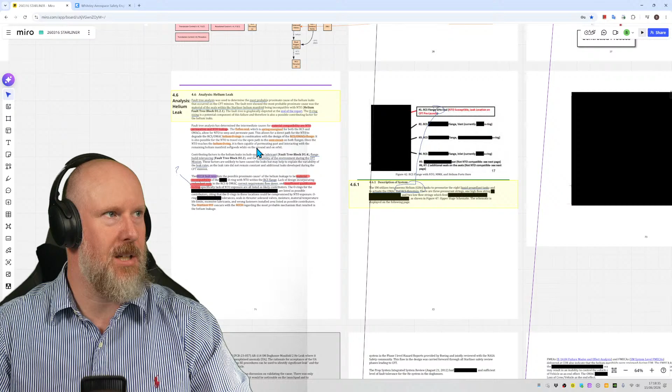We got quite far through that, let's see how far we got. Yeah, we got to the end of that section. And so the next section we're working on is 4.7, analysis, deorbit capability, fault tolerance. So this is a slightly different topic.

So let's take my jigsaw piece. I ought to make this available for download, I keep saying that and I've not done it yet. There we go, section 4.7. So let's start with that then. Make sure audio is working. Yeah, we've got some streaming, the internet's working, that's good.

Okay, here we go. So following the first crew flight test launch attempt, in conjunction with the discussions regarding leaks in the helium manifolds of the service module reaction control system propulsion system, NASA and Boeing teams realized that the service module propulsion system was not two failures tolerant for the deorbit requirement. So I'm just going to make a note of that: it's not two failures tolerant for the deorbit requirement.

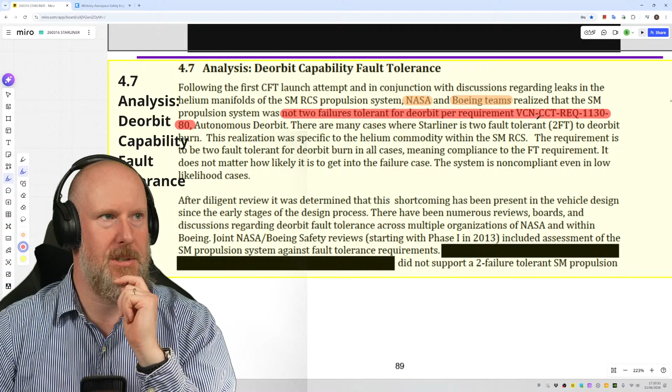Requirement 1130-80. So I imagine they've got a really elaborate requirements management system, and that'll be written in a lot of their safety case equivalent documents, and they'll use that as part of making go, no-go decisions. So of course, if they've realized that the service module propulsion system was not two failure tolerant before they did the actual second launch attempt, there's an interesting question there over whether it was really appropriate to go ahead with the launch or not. And of course, we've just read the third sentence in a paragraph in a massive report.

So of course, I'm anticipating there's going to be some more discussion about that. But from a safety constraints perspective, if that is the requirement, we need to be two-fault tolerant for deorbit, and they know before they've launched that they're not going to achieve that. Is it really appropriate to then go ahead and risk doing that launch?

Now, of course, I'm saying that from a position of not having read the rest of the report, so I don't know what I don't know. Maybe there's a lot of other things going on. So what I've said is a bit of a ridiculous lay thing to say, and I don't know that yet. I'm going to learn that as we go through the reports. But if that's the safety requirement, that's the intent, then it sort of raises eyebrows a little bit.

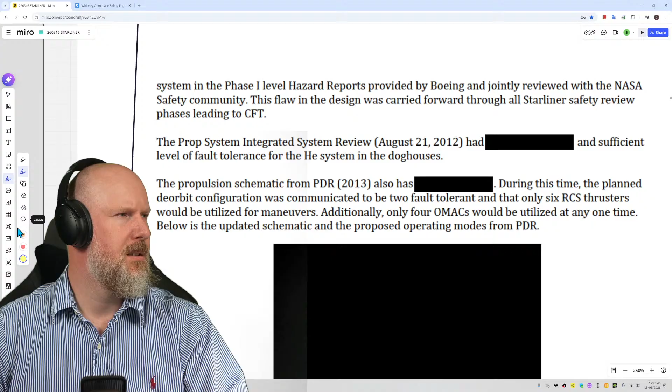Okay, that's the Propulsion System Integrated System Review, August 21st, 2012. So that's quite a long time ago in the context of things. It had an insufficient level of fault tolerance for the helium system in the doghouses. The propulsion schematic from the PDR in 2013 also has this flaw.

During this time, the planned deorbit configuration was communicated to be two-fault tolerant, and that only 6 RCS thrusters would be utilized for maneuvers. Additionally, only 4 OMACs would be utilized at any one time. Below is the updated schematic and the proposed operating modes from the PDR.

Which we can't see because it's blanked out, which is perfectly fine. I can understand they don't want to put a propulsion schematic in a publicly releasable document. I totally get that, you know.

The propulsion schematic from CDR indicates 2 helium manifolds per doghouse and GNC subsystem CDR, which occurred in April of 2014. So that is guidance, navigation and control subsystem critical design review. So this is an important milestone in the program.

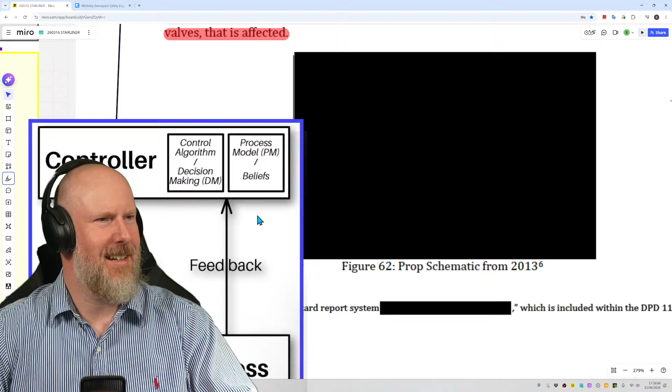This schematic is within the hazard report system, which is included within the DPD 110 and therefore has limited rights. So if I remember correctly, this type of hazard report document is subject to some kind of data protection contractual rights of release of data. Therefore, it can't be released in this report. And I wouldn't expect them to do anyway, to be honest.

But if I've interpreted what this says so far, it sounds like the design was not two-fault tolerant for the helium part of the system. And the helium part of the system controls the... where is it? Yeah, that bit there. It's used to pressurize...

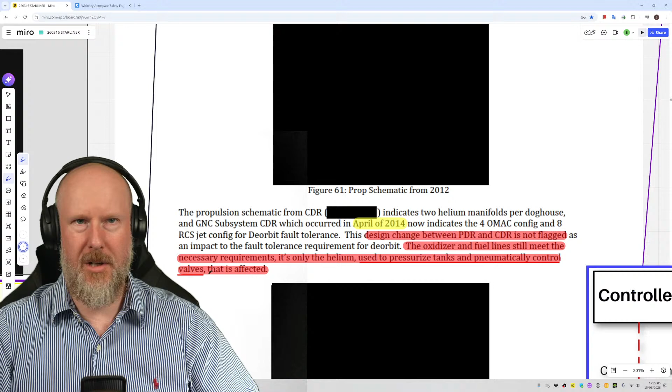The helium system is used to pressurize tanks and pneumatically control valves, so we're talking about valve control. If we get our little jigsaw piece out, we're talking about this control path here. There are some actuators in there of which the helium system is contributing to, and the control of the helium system is in there somewhere, and that has an implication for thrust, controlling thrust.

The shortcoming has been, after diligent review, determined to have been present in the vehicle design since the early stages of the design process. There's been loads of reviews, boards and discussions regarding that fault tolerance within Boeing and NASA. Then the safety reviews begin in 2013, including an assessment against fault tolerance requirements. It did not support a 2 fault tolerant service module propulsion system in the Phase 1 level hazard reports provided by Boeing and jointly reviewed with the NASA community.

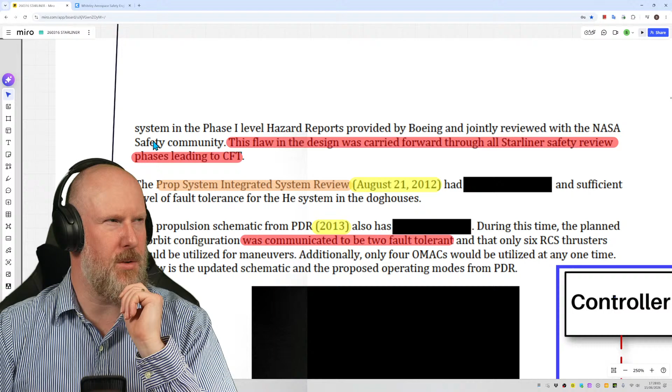This flaw in the design was carried through Starliner safety review phases leading to CFT. Now, I'm not quite sure I understand what's been said here. It kind of implies that the architecture, the design is a flawed design. It doesn't meet the requirement. So that's one thing. That's the first thing.

But it seems to imply, and I might have interpreted it incorrectly, that this wasn't obvious until there was a diligent review during the launch process, or that's when questions were started. That's one way of interpreting it, and I might be interpreting it wrong, so please type in the comments and let me know what you think. But the other side of it is that they knew about the flaw in the design, in the requirements, not meeting requirements, and it was carried through all the way through to CFT.

So this is kind of a second engineering topic that's found its way all the way through to the end. It should never have got this far. Or that's my interpretation - the intention is it should never have got this far. So why has it? And why has it been acceptable for the crewed flight test? Is it because there's so much pressure at that stage? Oh, well, we've got what we've got. We are where we are. I'm sure that's famous words that you've all heard.

We are where we are, Simon, so we're going to have to do it. And I'm like, no, this is what the safety requirements say. If you're going to decide to violate the safety requirements the literal day before we're going to go flying, that's not really how the safety process is supposed to work. But if the safety engineers are overruled by project managers, then this is where we are.

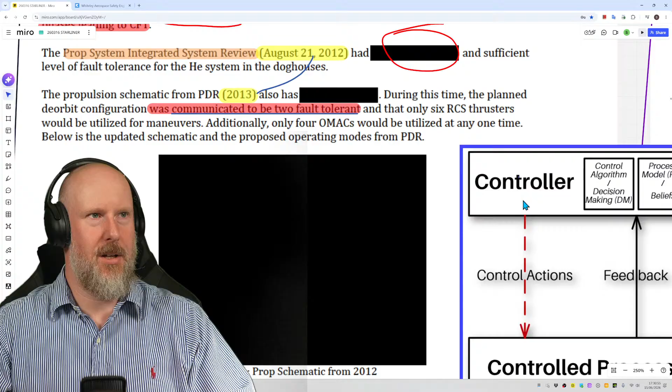During this time, the planned deorbit configuration was communicated to be two fault tolerant, but it wasn't. Is that what this is saying? Because if it was communicated to be two fault tolerant, let's look at our little jigsaw piece. If whoever this controller is tells this other controller, hey, our helium system design is two fault tolerant, you could say that that's an unsafe contributory control action. There's a whole conversation there about what do you mean by unsafe and what do you mean by contributory? Isn't it only known in the context of an outcome of an accident that, oh, actually it should not have been communicated to be two fault tolerant?

And only 6 thrusters would be utilised for manoeuvres. So again, if that number has changed over time, the architecture has changed, then that needs to be reconsidered. Additionally, only 4 OMACs would be utilised at any one time. So again, if that's an assumption that's changed, then the analysis needs to be updated.

And then below is the updated schematic and proposed operating modes from PDR. So if that's PDR, let's just write PDR. There's my really bad handwriting. Let me try with my pen. So I've got one of these fancy pens.

Let's see if it works. It's not quite as good as my Apple Pencil, but it works. It'll do. Oh look, there we go. It's better today, why is that easier?

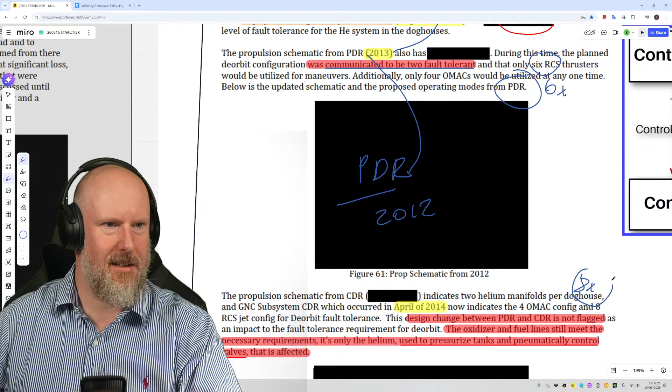So that's the 2012 PDR schematic, from, well it says 2013 there, but there we go. And then the propulsion schematic from the CDR, which we don't know when that was. Oh there we go, April 2014, now indicates a 4 OMAC configuration and 8 RCS jets. So that's 6, this is 8. There we go, it's still 4 OMACs. So there's 4 there and 4 here.

There we go, so it's got more thrusters. For deorbit fault tolerance, this design change between PDR and CDR is not flagged as an impact to the fault tolerance requirement for deorbit. The oxidizer and fuel lines still meet the necessary requirements. It's only the helium used to pressurize the tanks and pneumatically controlled valves that is affected.

Okay, and then there's the propulsion schematic from 2013. So I'm presuming that's the CDR. Oh what's this say? Yeah, okay, let's keep reading.

I'm jumping the gun, FMEAs and FMECAs. So FMEA is failure modes and effects analyses. And then FMECA is failure modes, effects, and criticality analysis. So these documents could be an update of these documents with criticality information, or they could be separate documents.

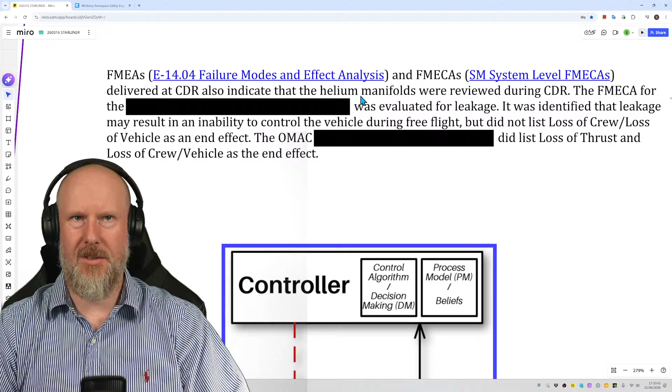And this says that it's so, E14.04 failure modes and effects analysis, and then service module system level FMECAs, delivered at CDR, also indicate that the helium manifolds were reviewed during CDR. The FMECA for the blankety blank was evaluated for leakage. It was identified that leakage may result in an inability to control the vehicle during free flight, and did not list loss of crew, loss of vehicle as an end effect.

Ooh. May result in an inability to control the vehicle during free flight, but did not. I mean, that is not good at all. That's really, really bad.

So there's an immediate question there over the controller. Who does the FMEAs, the FMECAs? So that's the first question. The second question is who reviews them and signs them off? And then there's a third question for flight critical systems, and there's a little star attached to that. Is there an independent reviewer looking at this? Is there an independent forum that's looking at these and going, well, does this correctly identify catastrophic outcomes?

Yes, no, and has it set requirements for catastrophic outcomes? Yes or no? So there's three little loops there to consider if we were doing the investigation of this, and also the process and the training for the individuals involved and the tool support, and then of course what is the context around these people doing this work? Is it a copy and paste FMEA from a previous incarnation of this design, or is it a fresh one? That needs to be considered.

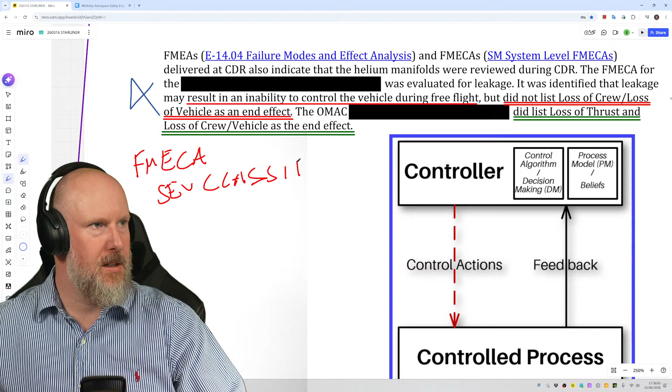So let's just get my red pen out, everybody. Here we go, so FMECA severity classification. I believe, if I remember correctly, this is exactly the same issue that occurred with the 737 MAX accidents. The FMEA for the MCAS system did not adequately set the classification for severity. Okay. That's not good at all.

Right, here we go, so this is a table, a row from the FMEA itself. And you'll notice this is the FMEA, not the FMECA. So there's two, one of them contains criticality, which is what should. And I am guessing, because some organisations, they use the label FMEA and FMECA to mean the same thing. And it could be that an FMEA in this context contains a criticality assessment, so they might use the term interchangeably. But these refer to two different things, by the way.

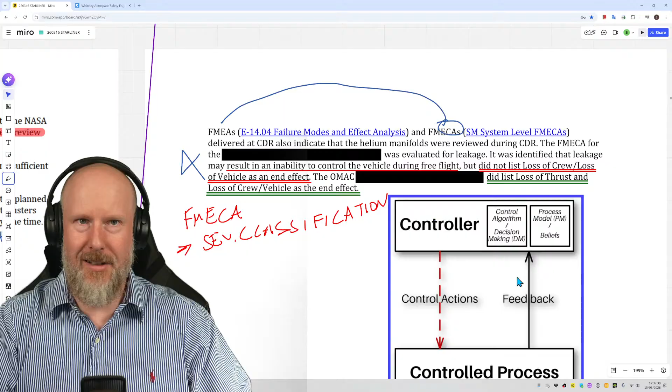This is a system level one. Now the system level one might be an amalgamation or a summary of other more detailed failure modes and effects analysis. So it is entirely possible that somebody did a very detailed FMEA or an FMECA, and then the detail of that was not transposed correctly into the higher system level FMECA. And again, let's get our little jigsaw puzzle out again. It is really interactions between organisations and how they flow information to each other. In this case, it'll be in documents and tables, maybe databases, maybe tools.

So if we're investigating that, they're the kind of things we'd want to understand and think about. But let's have a look at this then.

So first off, when you're reviewing any FMEA or FMECA, one of the things I always do is ask the question: where is the FMEA template from? Is it based on a particular standard or regulation, or a company process? What is the origin and pedigree of that? If it's just copy and paste from the last project an engineer's worked on, or copied from off the internet, or maybe AI has said, hey, let's do an FMEA this way - I'm being facetious, but the point is you should have credible sources, credible pedigree for the processes and analysis that you use.

So, of course, in civil air transport there is ARP 4761, Aerospace Recommended Practice, that has an appendix showing how to do an FMEA. And I imagine they will use something similar for this, but I don't know. In fact, there is a space standard for this. It's called the ECSS FMEA standard.

This is for the European cooperation, so hang on, it's in there somewhere - standards, active standards, let's search for FMEA. There we go, there it is. Look at that, so there is this one. This is the European one. So if you don't know about this existing, or if you do, I recommend having a quick flick through it.

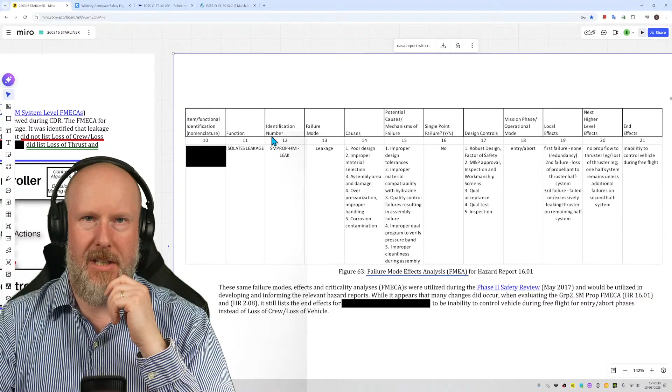Item, function, identification, nomenclature. Function isolates leakage. Okay, what leakage of what? Identification number - let me zoom in for you. Service module propulsion dash HMI dash leak. Failure mode: leakage, causes - there's 5 causes in there. Potential causes, mechanisms of failures - sorry, there's 5 of those. Single point failure: yes, no.

Interesting. I'd like some justification why they've said that. Why is it no? And again, this is just one thing - when you're doing any kind of safety case review, safety review, the question is: what is the claim? What is the argument? What is the evidence? If the claim is true or false, what's the argument, what's the evidence? Just saying yes or no is not adequate.

I could understand when you're doing an analysis like this with lots and lots of rows and tables, it may be that there's one, or let's say a subset of 5 reasons why it's okay, or it's okay to continue when it's not. You could just put those in a table at the bottom and refer to which of those, or which combination of those 5, are relevant.

Design controls, mission phase, operational mode, entry, abort, local effects, next higher level effects, end effects.

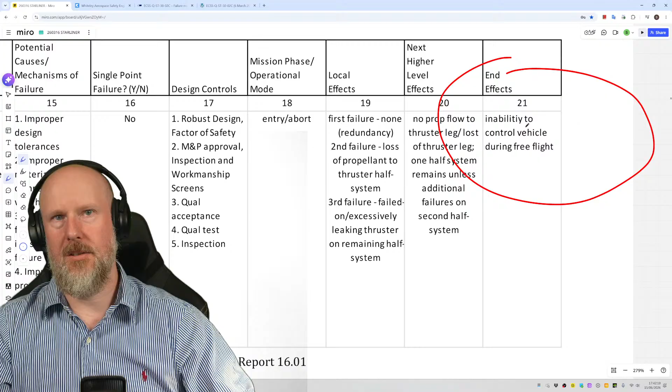Okay, so this column is the one that doesn't have the judgment as to whether it affects crew safety or not. So this is where it should be in there - so what did they call it? Yeah, list loss of crew, loss of vehicle as an end effect. Did not list... yeah, did list. Okay, so for whatever reason, they've not put it in there.

So the investigation needs to go and establish, well, why was that? And we're not here to point fingers and blame people - that is absolutely not what it's about. It's about understanding why it makes sense not to include that. And if it's literally, 'Simon, I'm using this really rubbish spreadsheet that does my absolute nutting and it's got 10,000 lines in it,' a bit of copy and paste error is guaranteed.

And if that's the case, and it is entirely possible, then the organisation needs to do something about that. And this is human machine interface - thinking about how humans do their work and how best to capture that work and make sure it's error free. That goes down to who does the review and in what form that review is done. If you have a specialist AI for your team that could do this kind of cross check, that would be helpful. But of course, don't rely on the results - it's got to be a human that signs this off.

Okay, so let's just zoom out a bit then. So this is the report for 1601. You notice there that number 1601. So I'm not sure if this is 1404 - I don't know if they're the same thing. Oh, no, 1601's down here, isn't it? So I'm assuming that this report here is 1601, or is that supposed to be 1601? I don't know. I'll not use a red pen because that's a bit over the top, isn't it?

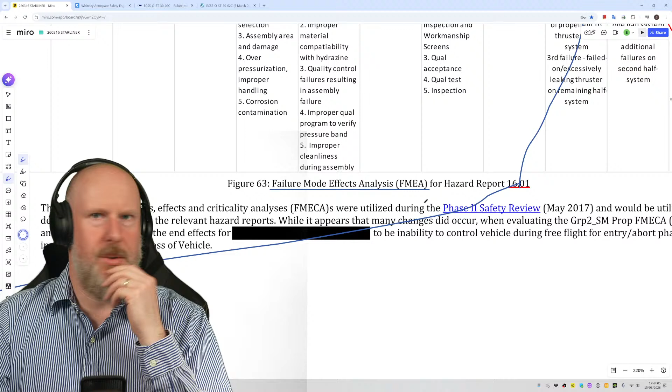There we go. Right, so the same failure modes, effects and criticality analyses were utilised during the Phase 2 safety review, which was... so that should be yellow to highlight a date. There we go, May 2017.

So was this a Phase 1 review? I think I saw earlier on - there's an integrated system review there in 2012. It doesn't say that there was a phase... Oh, there we go, there's the Phase 1 review in 2013. So that's a Phase 1 safety review in 2013, and then the Phase 2 was in 2017. In fact, what I'll do is I'll use an arrow because it's a bit cleaner, isn't it, than some scribbles across the page.

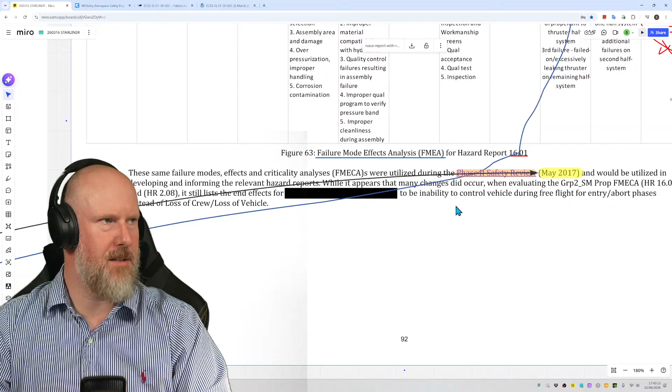There we go. Right, and would be... So it's these same failure modes and effects and criticality analyses were utilised during the Phase 2 safety review in May 2017. So the first one was 2013, four years later is 2017. And would be utilised in developing and informing the relevant hazard reports.

While it appears that many changes did occur when evaluating the Group 2 Service Module Propulsion FMECA 1601, so that's this one just here, and HR 208, it still lists the end effects for blankety blank to be the inability to control the vehicle during free flight or for entry abort phases, instead of loss of crew, loss of vehicle.

So let's get a little jigsaw piece again, everyone. Let's just say, well, okay, so this is our FMEA analyst, and they've done their first order effect, local effects, next order effects, and they're writing in their FMEA report, what are the end effects? Well, the end effects is the inability to control vehicle during free flight. Now, it may be that it could be just finger trouble and they've accidentally deleted or not added the text they meant to - you know, we're all humans. But it could be they've made a conscious decision.

Well, we know that there's an inability to control vehicle during free flight - fantastic. But this individual at this level of abstraction in their team, you know, let's assume that this is an individual writing this and not a team doing workshops. Maybe there is a workshop and they didn't have the right people in there. Or maybe the people reviewing these massive tables have just got blinded to all the rows and they don't do FMEAs themselves - they just have to review them. They don't necessarily understand the implications. It's just they've missed it off. Or they're not able to assess whether it affects anything else, whether it will lead to a loss or not. Maybe they don't know that.

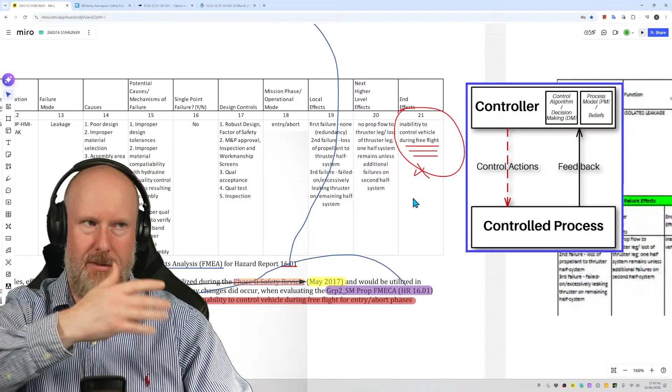We don't know the detail of that yet. But one of the other things I'm going to do is go back over and just talk about this FMEA for a minute. Let's have a look.

This says isolates leakage is the function, the service module propulsion HMI leakage. Now it's not really clear to me what component this relates to. Is it the pipe work or the valves, or the service module propulsion HMI leak? Is that what HMI is? Is that human machine interface? Is it helium mechanical interface? I don't know, it's not clear.

But if we're thinking about things through the lens of STPA with this control loop, we're either talking about this control action, the control path between the controller and its control process. In this case, the helium system is used to control valves, so the component is inside this control action's control path. We also know there's some level of feedback involved in terms of valve positions and whether the helium pressure and volume is reducing. So this line in the FMEA is directly relevant to these two elements of an STPA analysis, if that's what we were doing.

So the first one, causes of leakage: poor design. If we're starting with basics like that, this immediately turns people's brains off from a creativity perspective. What we should do is have an FMEA or any safety analysis done in two parts. One is about the obvious, trivial stuff everybody knows - it needs writing down, but it shouldn't be the main thing we're looking for. It's like doing spot the difference between two cartoons - these are trivial things we should capture, but our creative brains are trying to find the subtle, non-trivial, significant things. This approach just turns your brain off. I find it really undermines your creative thinking. It bores people to death.

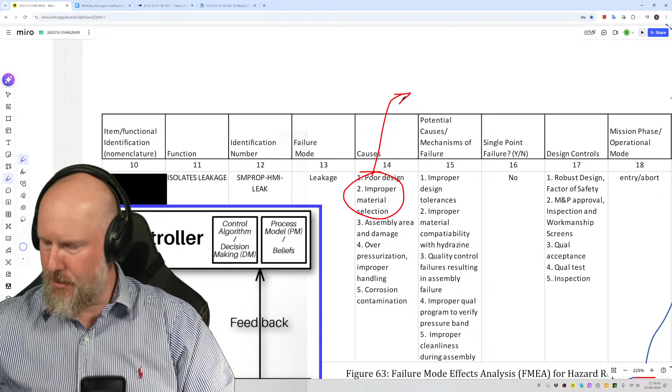Let's get my pen, let's get on my high horse. There we go. What about O-rings? NTO versus O-rings. FMEA.

There we go - assembly area and damage, over pressurization. Hang on a minute, pardon me. Over pressurization, improper handling - why are they on the same line? Corrosion, contamination - they should be two separate things.

Already I'm not particularly impressed with this FMEA, but then I don't think I've ever read an FMEA that I've actually found quite good, I'll be honest. I'm not saying it's easy, because it's not - it is hard, it can be soul destroying. So I totally understand.

Improper design tolerances, improper material compatibility with hydrazine - so that was hydrazine there, look. But that's not quite the same as NTO, I don't believe. I don't know, give me some abuse in the chat - is hydrazine NTO, or is there some slight difference between the two? I don't know, I'm not an expert on this.

Quality control failures resulting in assembly failure. Again, failure - you're losing when you just say failure all the time. Improper qual program to verify pressure band, improper cleanliness during assembly.

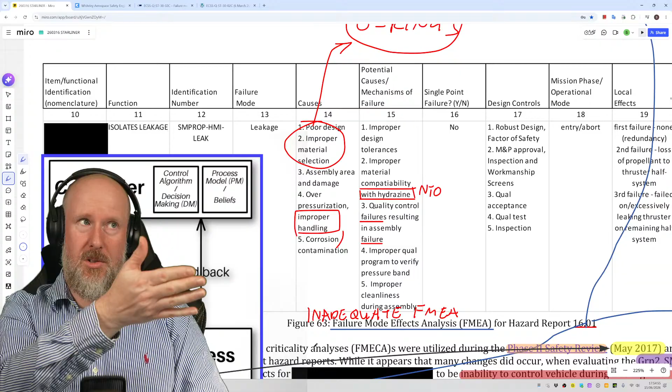But this is a bit superficial, and unfortunately FMEA is a bit superficial. But it does have its place, in my personal professional opinion, when you have somebody who is an expert in the physics of failure of the things we're talking about. So long as the FMEA is pitched at the right level of detail, where they can start adding physics of failure - we were talking there about material compatibility with hydrazine. I would expect the person with the physics of failure and the knowledge of material compatibility to either be filling this in or providing the information to the person or team who fills this in, and that they've got a reference number and can refer to a memo or some technical report that confirms the material compatibility issue, so that it is traceable.

Because a lot of these are just copy and paste. They might be just opinion, or literally selected from a drop-down menu, copy and paste. And then the value of this method becomes limited. Improper qual program to verify.

Yeah, okay, so we've said all of this. Yeah. Not surprised.

Talks a bit about pressure. Does it talk about temperatures? Is temperature involved in there? Pressurization, corrosion, improper design tolerances, compatibility. No, there's no temperature-related stuff in there.

Temperature, shock. Shock is a good one. FOD, or what do they call it? What's the term? Impact.

Like if you're doing a particular risk analysis for a gas turbine jet engine that was to suffer an uncontained engine failure, and you've got bits of high energy debris flying around all over the place, you're thinking about the fuel manifold around the outside of the engine, for example, you'd certainly want to think about that. So you could have FOD, impact, high energy debris, micrometeoroids, I think was mentioned earlier the other day. So let's stick micrometeoroids in there. Meteoroids. Is that right? Yeah, maybe.

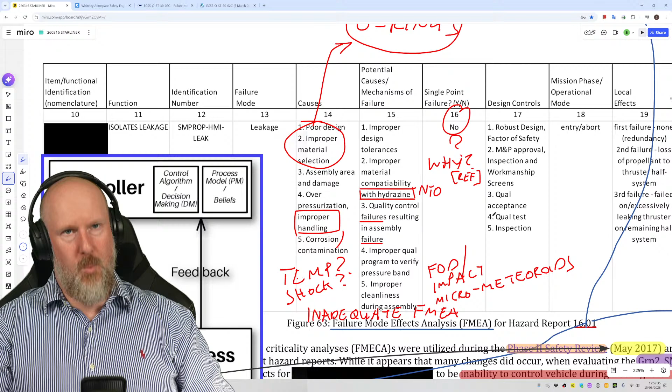Okay, single point failure, no. I'm not so sure about that. Why? What's the justification? What's the reference for that justification? Because there should be - well, I say should - some organisations will have a failure modes and effects summary document which will essentially summarise all of these massive tables, and they will have a list of all those that are single point failure yes, and single point failure no, and they will capture justification for those.

So shouldn't normally be left just as a flat no. But yeah, okay. Design controls, robust design, factor of safety. What factor of safety? What's the reference for that? Is it 2 to 1? Is it 1.5? What is it?

M&P approval, manufacturing and production approval. I don't know what that means. Maintenance, maybe. Inspection, workmanship screens, quality acceptance, quality testing, and then inspection. Is that not the same as this? Design controls.

Yeah, this is just weak. I've seen some pretty poor FMEAs in my time, and this is not giving me much confidence.

Mission phase operational mode - so what relevance does that have? Is that when the leakage occurs, or what relevance does this have to the function or the failure mode? I mean, there may be another line immediately below this that talks about the other operational modes. One of the other things I'd look for is a reference for this mode. Is this a specific defined mode phase that is used across all of the FMEAs across the entire system? Or is this just this analyst deciding, oh well, it's during the entry and abort phase, isn't it mate, instead of defining what we mean by entry and what we mean by abort. Because yeah, anyway.

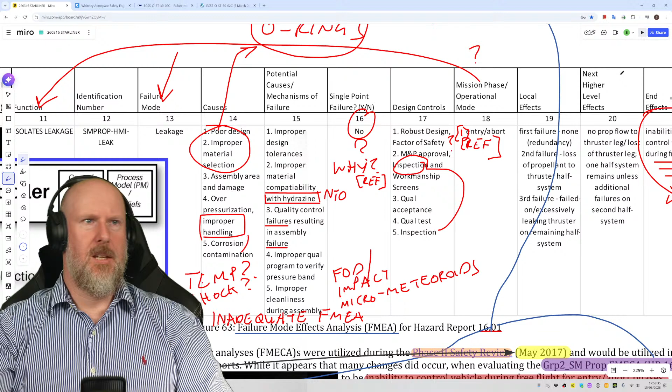Local effects, first failure, none. Redundancy. I mean, are we talking about one bit of pipe or one valve that's leaking? Or are we talking about a complete loss across the entirety of the pipe work?

Second failure, loss of propellant to thruster half system. So half system implies we've got a full system, which is two parts, and it's isolated and completely separate, and cannot be combined in a way that could lead to complete loss of propellant. And again, it says thruster. What about thrusters? Are there more than one thruster? Thrusters. More than one? Hang on. More than one.

There we go, system. Third failure, failed on excessively leaking thruster on remaining half system.

Right, so let's get our little control loop out. Let's bring it to the front so we can see it better.

There we go. So the first failure, and we're talking about either the control path or feedback path. What is the first failure? If we get failure mode leakage, it's not clear what type of leakage we've got. Is there a leakage level below which we're not too fussed about, and above which that's important, and then above that it's really important?

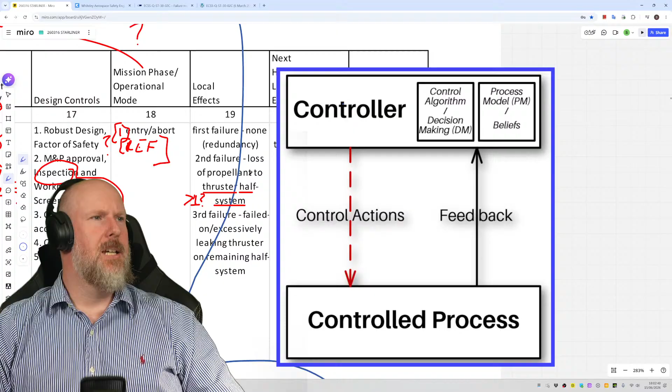So the first failure is, well, what do we mean by first failure? Is it that we affect the control path, or the feedback path, or both of those? And when we're talking about second failure, loss of propellant to thruster half system, is that one thruster or many thrusters? Is it on a particular side, or opposite sides, or what? Because that might be important.

And it's important to get your head around that this is a single failure, we're saying helium leak, and we're thinking about what is the single effect of that? What is the single second order effect? What is the single third order effect?

There's no consideration in this analysis of what else might be going on, because there might be other things happening. We might have a faulty thruster, or maybe one of the two branches - one half of the system is not available for some reason, a genuine reason. And we get this leakage on the other half. All of a sudden, it's a bit more serious than just this one single failure.

And then the third failure, failed on excessively leaking thruster. So this is loss of propellant, and this is excessively on.

So if you think about our control actions, I'll just jump up to the top to talk about types of control actions. Where's my little diagram? There we go, this one. So if we're thinking about types of control actions, not provided is effectively loss.

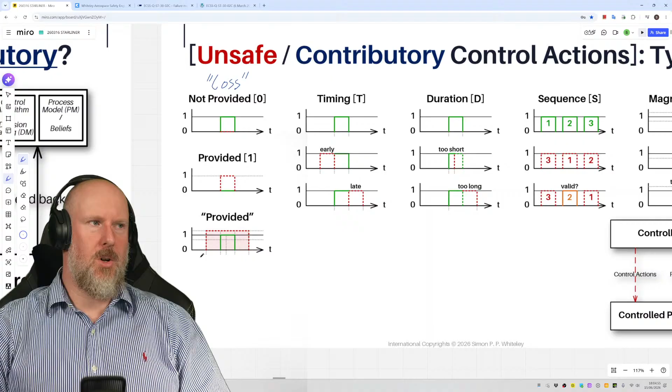But if we want to get specific, we have to explore what we actually mean by provided. Is it related to magnitude, in this direction, or is it related to timing? If this is too early, is that a problem? If it's supposed to be here and actually it's late, is that a problem? Or are we talking about the entirety of the duration of it, if it's too long or too short? And this is it really - timing early, timing late, duration too short, too long.

And then of course, if it's relevant, if you're talking about some kind of digital interactions, you could have sequence elements to do with it. So normally it should be 1, 2, 3, but if you get 3, 1, 2, is that a problem? Or if you get 3, 2, 1, is that a problem? Because it may be that number 2 in the second position is treated as valid because that's how the system is designed. And then of course, if magnitude is relevant, you can think about too little or too much.

So in terms of this particular part we're looking at, that we're zooming into, this one line here has 3 different scenarios in it, 3 different local effects. And this one here is excessively leaking, and this one is loss.

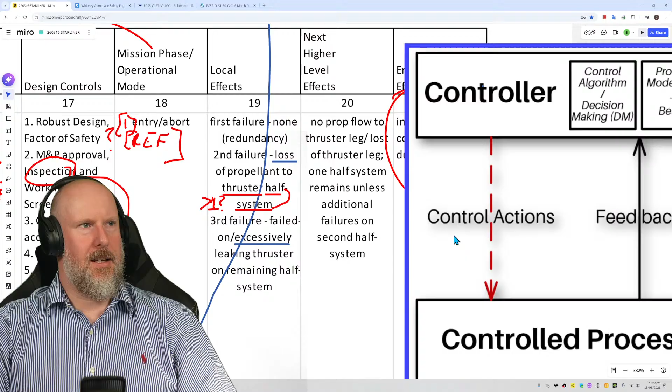So yeah, we talked about that. And of course, this doesn't talk about the effects on the control system, the control loop, that this particular failure mode is relevant to. And that's where STPA comes in, because both STPA and CAST force you to consider, well, what is the impact of this helium leakage on my control actions? What is the impact upon my feedback? You know, is it such that a small leakage might lead to the controller using these systems to provide control actions? It might believe that something is safe when actually it's not.

So I'm hoping you can see that using STPA and using this jigsaw piece, it can really open up some really subtle but really, really significant non-trivial issues that may not be failures. Because of course FMEA is all about failures, and in this case not very good.

No disrespect to the people that have done this. I can completely understand, I've seen similar elsewhere. It's not that I'm pointing fingers and saying everybody's bad. I'm just saying if you had a better tool, which is STPA, maybe using STPA in line with doing your FMEAs, you could do a much more cleaner job.

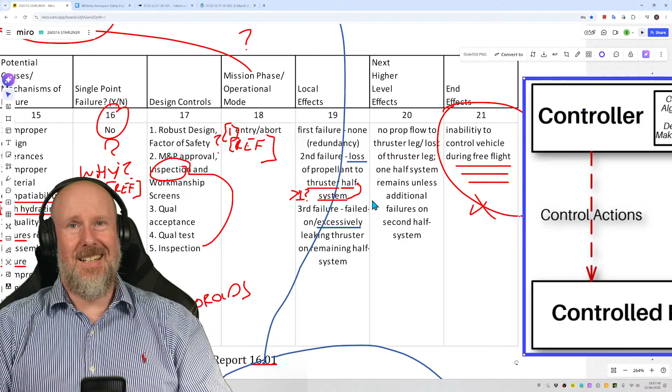And then next higher level effects, no propulsion flow to the thruster leg, loss of thruster leg, half system remains unless additional failures on second half system. So there's a big assumption there. So again, that is related to control actions, but possibly feedback. And then of course, end effects, inability to control vehicle during free flight.

Of course, now if we were doing an STPA, we've already identified if we get this unsafe control action and it's due to issues with helium, we already know within 10 seconds whether that's going to lead to a catastrophic outcome or not. And so you could cross-check with the FMEA and identify that weakness with the FMEA.

Right, okay, so I've done that to death. I'm just going to have a quick drink. Let's just have a quick look at the chat, see if anyone is giving me any abuse in the chat. So let's have a look. I don't know if it's still working on LinkedIn. I think it is, but let's find out.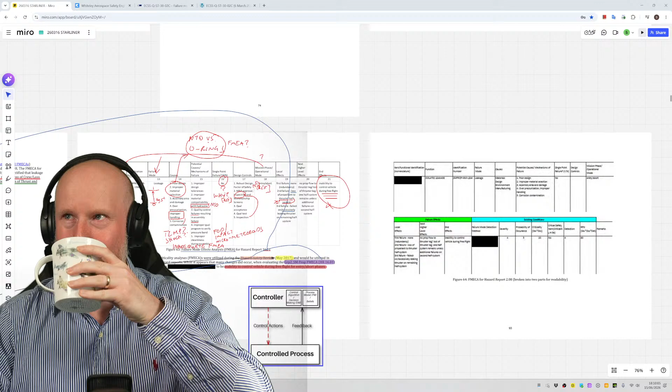There we go. It's 6:10 already. Wow. Right, so let's look at this one.

So this is the FMEA report for Hazard Report 208, broken into two parts for readability, because of course these spreadsheets can be massive. Right, so that's 208. Let's just highlight that. There we go, so this is 208.

And this one was 1601. So 1601 is that one to there. There we go. And then for 208 is this one over here. So let's just drag this over here. There we go, that's it.

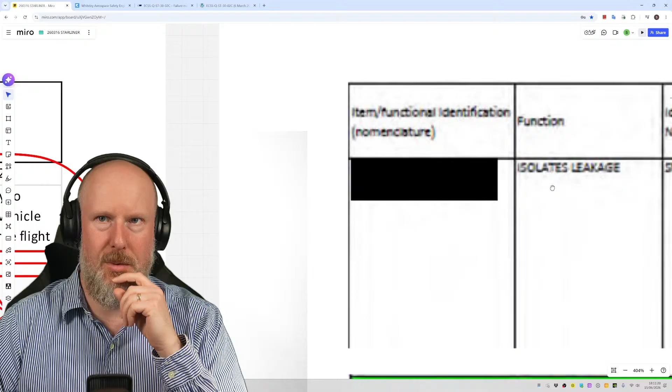Right, so let's have a look at this one then. So you'll notice we've got function isolates leakage, so that is the same. This one here is the same as this one. Again, I don't quite understand.

And of course I've not been involved in the analysis, but just in terms of the function of the helium system in this part of the spacecraft, my understanding is its prime purpose is to support control of thrust. So why does this refer to isolating of leakage? Why is that? Why not thrust control?

So I'm just going to make a note of that. Question mark, thrust control. And I must apologise.

Obviously this session is supposed to be about STPA, CAST, and STAMP, and I'm here tearing through an FMEA. So, yeah, anyway, let's keep going.

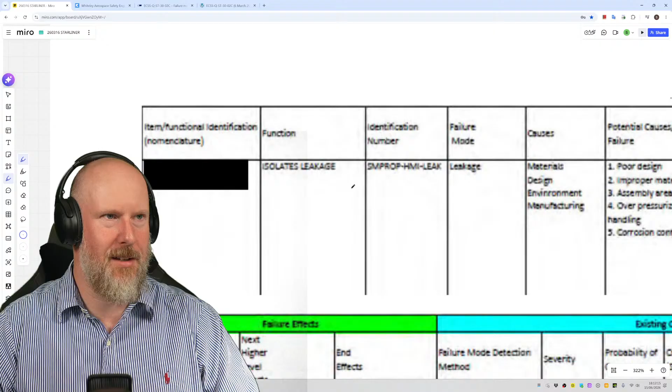So, SM prop HMI leak, SM prop HMI leak, so that is the same. Failure mode: leakage. That is the same.

Causes. Again, like I said, if you're doing tabular analysis like this, it's a good idea to have an index, a dictionary or list of common causes, so you can use them across the entire analysis, and then have specific ones for specific rows, so you have consistency across the document and traceability so you can go back and trace it. So this might be reference materials: design, engineering, environment, manufacturing.

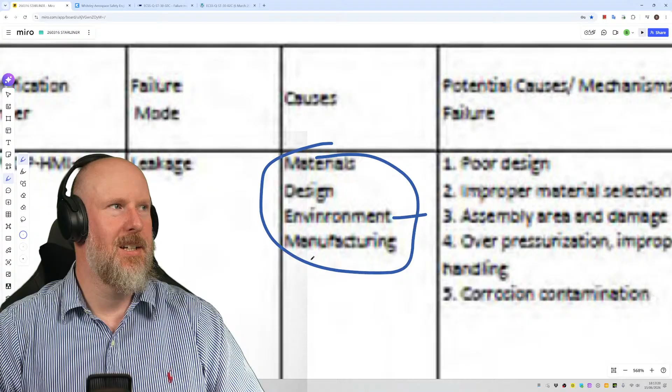Again, this is not enough. What about micrometeoroids? What about temperature? What about stress? What about the way the thing is installed? Is it tested before it leaves the factory? All of that good stuff. What about FOD? Cracks - are there any cracks in the thing? Is it crack tested? Is it pressure tested? I don't know, this is just very, very weak.

But I appreciate this is kind of common across a lot of industries, and I can understand why, but we really need to do better on this kind of stuff. And like I say, STPA allows us to be more laser focused than this copy and paste malarkey. Poor design, improper material selection, assembly area and damage.

Overpressurization, improper handling, corrosion, contaminate - yeah, so these are the same as before. As before, single point failure, no, as before. Design controls, none. Entry abort, that's the same as before.

Failure effects, existing conditions. Okay, so local effects, next higher level effects, end effects. So that's the same. First failure, non-redundancy.

Second failure, loss of propellant to thruster half system. Third failure, failed on excessively leaking thruster on remaining half system. Again, this is 3 different scenarios, and they should be explicit themselves, I think.

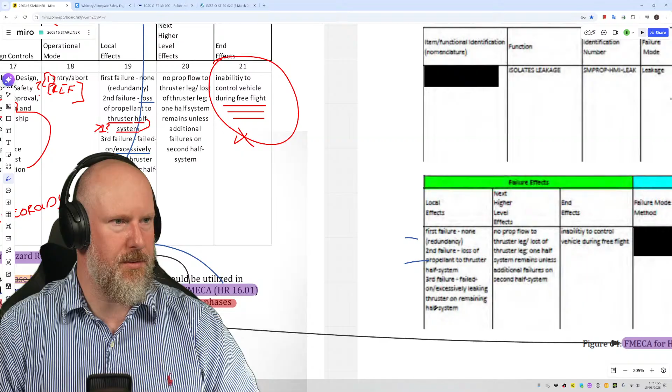So it's obvious that there are 3 scenarios here that we need to think about. I don't think this is good enough. If I was reviewing this professionally, I would be rejecting this with some big comments.

And I can appreciate that some organisations might be like, oh, the information is there, it's just not in the format that you need. The information is there if you read it and spend time reading it. Yeah, I get those comments, but come on, we should be trying to help each other here.

This is a safety analysis. We should be taking it seriously and doing it carefully and diligently. And that's not a comment for the people that wrote this one - this is more of a comment for some of the people I've worked with in the past. And maybe I'll share that one day.

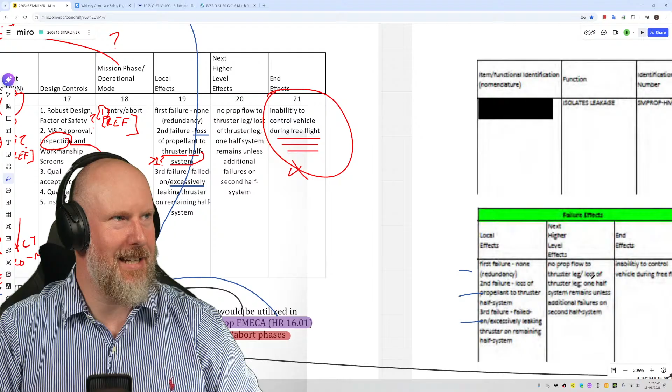Failure effects: no propulsion flow to thruster leg, loss of thruster leg, half system remains unless additional failures on second. So this is exactly the same as the other one.

End effects: inability to control vehicle during free flight. Yeah, so exactly the same.

When it says during free flight - just for a minute, entertain me - does this mean under crew control or automated control? And does it matter? Because free flight to me sounds like manual control of the crew. But does that imply that if it doesn't mention automated flight, then that's okay?

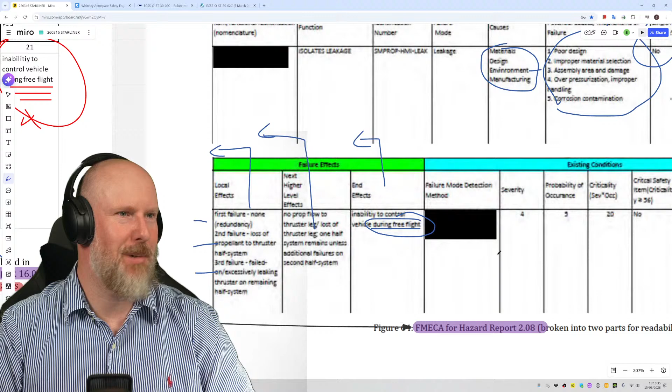I don't know. Failure mode detection method: blank. Oh right, hang on, it's blank. So they've chopped it out, they've omitted it. Okay, so let's go to our little jigsaw piece here then.

So we have this problem in the control process, which is a helium leak. What feedback do we get? What sensory feedback do we get? How do we detect it? Is it detectable? Who or what is the controller that detects it? What actions do they need to take? And of course, the big one is, what is the time lag between detection and resolution? And is it so much time that it degrades so that it's unrecoverable, irrecoverable, and very dangerous? Is it even detectable? I don't know.

These are all the questions that, if you use a control loop to shape your thinking, you'll be able to find things more detailed, more quickly. So there may be a detection method and they've just not included it. But that's where we'd think about, well, what is the detection method, and is it just feedback we're talking about, or have we detected it and can now take some action, or we can't take action, but at least we know about it. So severity 4 - I'd have a reference that says where this comes from. Where is this definition? It may be that the header of this report explains where all these definitions are, but it's always a good idea to remind everybody these are based on specific definitions. They're not just made up on the day.

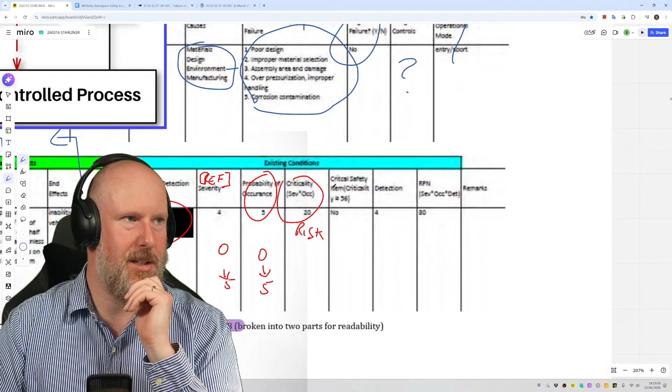Is there a risk matrix that we're trying to work within the boundaries of? Are we trying to bullshit ourselves with a risk matrix? Critical safety item, criticality 256 or 56 or something. It says no. Why is it a no? Why? Why is it a no, everybody? Come on, what's the justification?

Detection - 4. Does that mean it's got a probability of detection of 4? And is that 4 out of 5, or is it good, bad? RPN, risk, severity, occurrence, detectability, whatever that number is - 80, sorry, not 30.

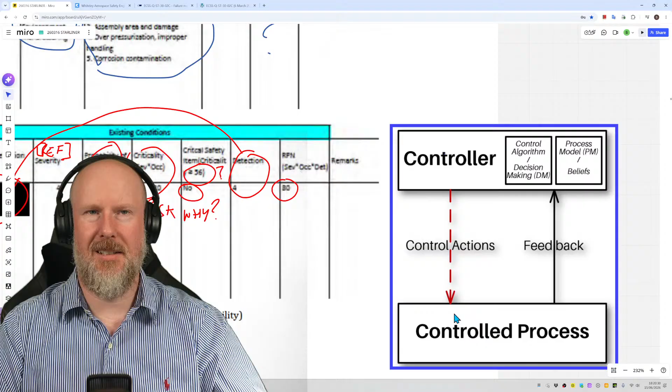So my question is, well, once we've done all of this magical FMEA nonsense - no disrespect to the engineers, I'm critiquing the method and how it fits into the safety process - once we've done all these fancy numbers, where do these numbers go? And what do they actually do for decision making and beliefs of the controller for the team? And what actions do they take? Because we've said here, apparently it's detectable and it detects it with a number of 4. Great, okay. What then? What does that do? What decision making does that number drive? And does it lead us to, oh well, it has detection and it's perfect detection, so it's fantastic, let's keep going, let's move on, the design's fine? Or does it actually prompt a thorough engineering review? I don't know, maybe it's a rhetorical question.

So yeah, that's fantastic, we've talked about FMEAs to death there. So we've got through 4.5 pages in an hour and 20 minutes, or an hour, should I say. Okay, so let's keep going to 4.71.

Here we go. So redundancy to - hang on, that's a new page, 94. So redundancy to combinations of service module propulsion system failures, including IPC failure.

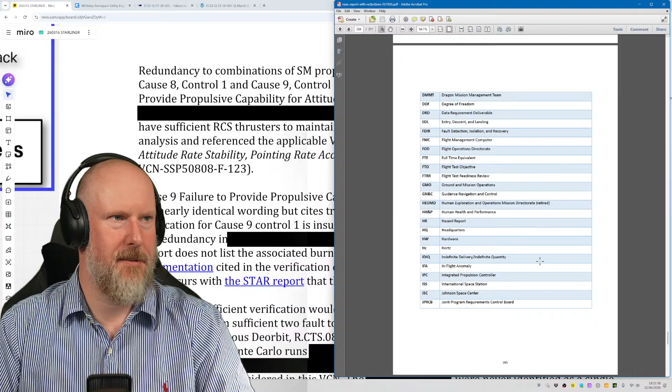IPC, what's IPC, everybody? Where's the acronyms? This is a different acronym list, and it doesn't have IPC. Oh, it does have IP. Oh, Integrated Propulsion Controller, okay, I've not heard that one. I don't recall hearing that one before. So maybe we talked about it the other day and I've completely forgotten because I've slept since then.

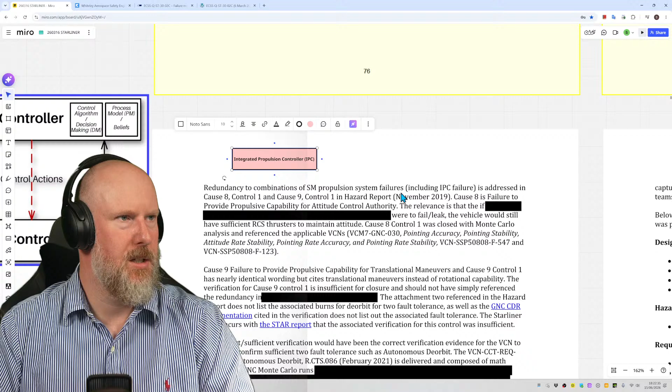Right, let's take that one and stick it down here. In fact, it's probably a candidate controller. So what we'll do - oh, it's there, look, Integrated Propulsion Controller, we already had it. It was already on the radar, but I completely forgot. There we go. So Integrated Propulsion Controller - we could say, well actually, Simon, this is the controller we're talking about, maybe. So redundancy to combinations of service module propulsion system failures, including IPC failure. So Integrated Propulsion Controller failure is addressed in Cause 8.

Cause 8, Control 1, and Cause 9, Control 1 in the Hazard Report, November 2019. Cause 8 is failure to provide propulsive capability for attitude control authority.

The relevance is that if blankety blankety blank were to fail or leak, the vehicle would still have sufficient RCS thrusters to maintain attitude.

What about changing attitude? Cause 8, Control 1 was closed with Monte Carlo analysis. Fantastic. And it referenced the applicable VCNs, which are the requirements, I think - pointing accuracy, pointing stability, attitude rate stability, pointing rate accuracy, and pointing rate stability.

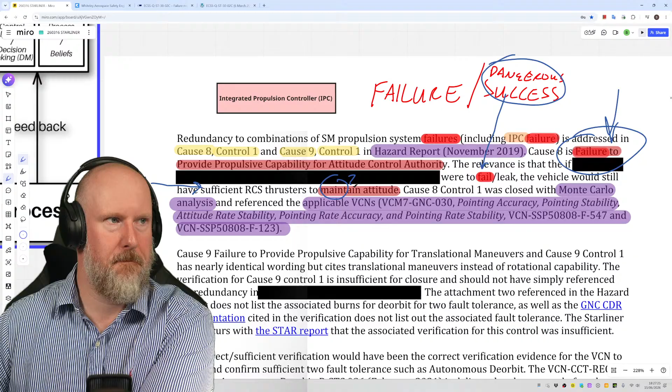That's the claim. Let's have a reference to where that claim is actually - sorry, it's off the edge of the screen, isn't it? Sorry, just bear with me a second. I'm there shouting and screaming, it's off the edge of the screen, you can't see it. There we go. So I wrote claim - so that's a nice claim.

What's the origin of that claim? Where does it go? Where's its reference? Where is it actually captured?

And it says that the Cause 8 Control 1, which I'm not really sure what that is - is that in this? So is this Cause 8, is it? So we don't know what the number is. So is this 8? I don't know. And it says there's a control - so there's some controls there.

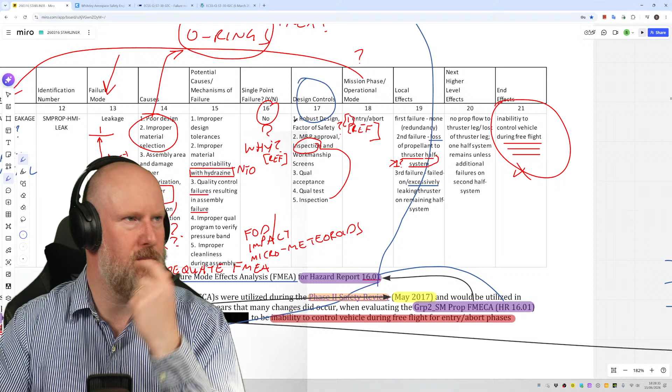Robust design - oh, right, hang on then. So control number 1 and control - oh, these Cause 8 and Cause 9, so they both have a Control 1. So Control 1 is presumably robust design, factor of safety.

But is the design robust? How do you justify that? It's just words at this stage. It's just words at the moment. It's just words, it's just words.

Was closed with a Monte Carlo analysis. Okay, well, why a Monte Carlo analysis? Why is that relevant?

And I'm not being funny, but that's not really a technical analysis in the context of looking at the design of the components and the artifacts, as far as I understand. It's got some numbers in it, fantastic. I don't use Monte Carlo analysis, so I can't critique it or really talk about it.

There we go, Cause 9, failure to provide, again, failure. This should be your new term when you go back to work tomorrow. If people start talking about failures, just remind them, what about dangerous successes? I've been listening to this bald bearded guy on the internet banging on about these things called dangerous successes. What about those?

Why don't we have a go with STPA? Let's get Simon to come over and give us a hand. Right, so Cause 9, failure to provide propulsive capability for translational maneuvers.

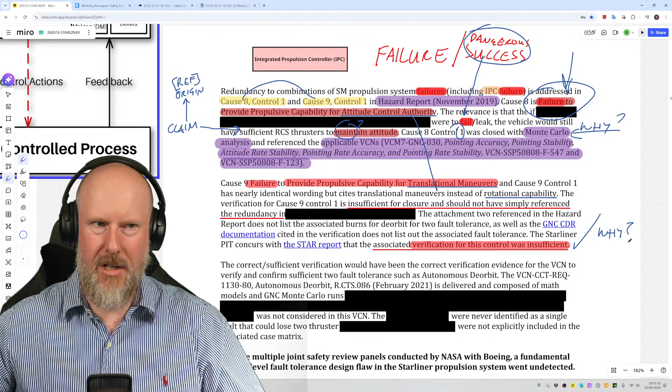Yeah, I kind of agree with that. Okay, but why? What was the organisation doing? Is it because they use an FMEA and it's a pain in the arse and it confused everybody and sucked everyone's life out of them and the will to live, and so they just wave stuff through? Or why was that? What was going on?

The correct sufficient verification would have been the correct verification evidence for the VCN to verify and confirm sufficient two-fault tolerance, such as autonomous deorbit. So I was banging on earlier about this definition here. No, this here, free flight. Is it human or automation control?

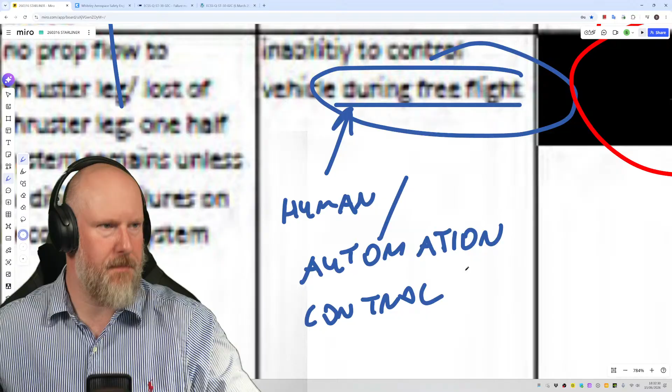There we go, apologies for the handwriting. Right, VCN-CCT-REQ-1130-80 autonomous deorbit RCTS 086 February 2021 is delivered and composed of math models and GNC guidance navigation control Monte Carlo runs, blankety blank, was not considered. Doesn't sound very good.

What is VCN? What is VCN, everybody? VCN, verification closure notice. Right, that's what that is. Let's go down here. Verification closure notice, VCN.

There we go, right, so I just get my little loop again. So these verification closure notices are apparently notices that float around the various systems between each other. They'll probably be managed in some kind of formal method with a formal process. I'd be interested to know how and why that works and how that might contribute or undermine this activity.

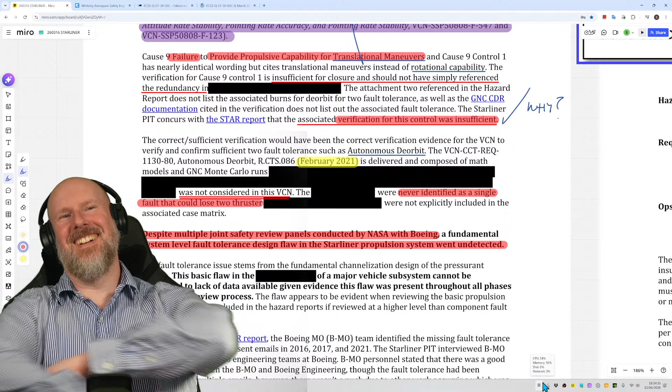I shouldn't laugh. The reason I'm laughing is because obviously in this case, with hindsight, it's obvious there's an issue. But the reason I'm laughing is if you used STPA, you'd have found this stuff. I'm willing to bet £1 million. If I had £1 million, I'd bet £1 million that you could find these issues up front without any of this potential risk to life and cost and everything else. I absolutely guarantee you could find this kind of thing with this method, and I would be willing to help you to do that. It'd be like shooting fish in a barrel.

I can't really talk about the European Space Agency stuff I've been doing, but yeah, anyway, they liked the results. And we're going to release some work on this, what we did with ESA, in the future. But I can guarantee we could have nailed this with STPA. Call me on the bet, I guarantee it. That's a big balls promise in the marketing world.

Anyway, the fault tolerance issue stems from the fundamental channelization design of the pressurant system. This basic flaw in a major vehicle subsystem cannot be attributed to the lack of available data, given evidence this flaw was present throughout all phases of the safety review process. The flaw appears to be evident when reviewing the basic propulsion system schematics, including hazard reports, if reviewed at a higher level than component fault tolerance.

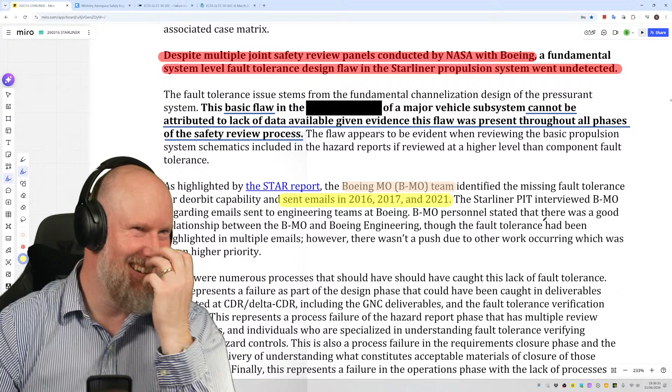This is ridiculous. Like, seriously, what is going on?

So if we're talking about the control loop, we've got these people called the Boeing MO, BMO, B-MO team, and they were sending messages. So if they were this organized, well, let's do it like this then. Let's bring that to the top. There we go. Oh, where's it gone? It's disappeared. There we go. I'll bring that to the top. Bring that to the top. Bring this to the top. Right, okay.

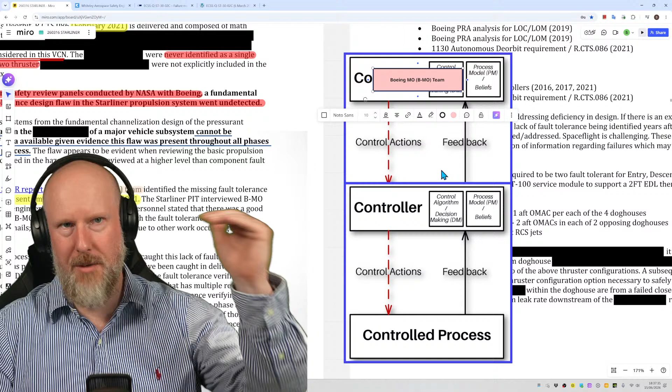So if this was the Boeing MO team, and I'm assuming that they're higher up in the organization, more authority, and they did some work, they received some information, did some work, and they said, hey, we've identified this missing fault tolerance for the deorbit capability. We've sent emails in 2016, 17, and 2021 to whoever this responsible party is. What happened with that? What was going on with that?

The Starliner PIT interviewed BMO regarding emails sent to engineering teams, so engineering teams at Boeing. BMO personnel stated that there was a good relationship between the BMO and Boeing engineering.

So I'll use my green pen. Look, everyone, I'm going to use my green pen for a change. Yay! There was a good relationship between BMO and Boeing engineering, though the fault tolerance had been highlighted in multiple emails. However, there wasn't a push due to other work occurring which was given higher priority. Ooh. Okay, so these guys have been prioritized to work on other things.

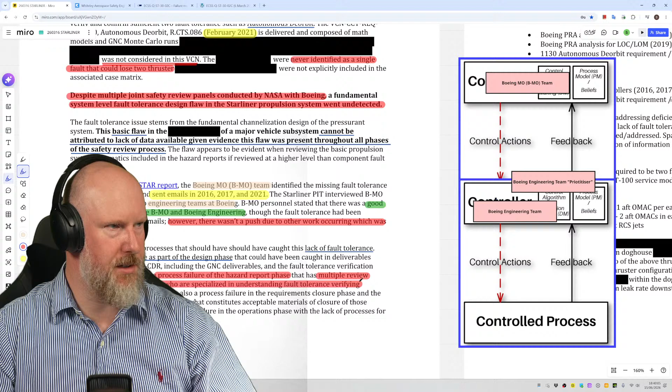caught this lack of fault tolerance. This represents a failure as part of the design phase. Yeah, I agree with that. That could have been caught in deliverables presented at CDR, Delta CDR, including the GNC deliverables and the fault tolerance verification products. This represents a process failure of the hazard report phase that has multiple review phases, tools, and individuals who are specialised in understanding fault tolerance, verifying associated hazard controls. This is also a process failure in the requirements closure phase and the associated delivery of understanding with what constitutes, sorry, you can't see that, what constitutes acceptable materials of closure of those requirements.

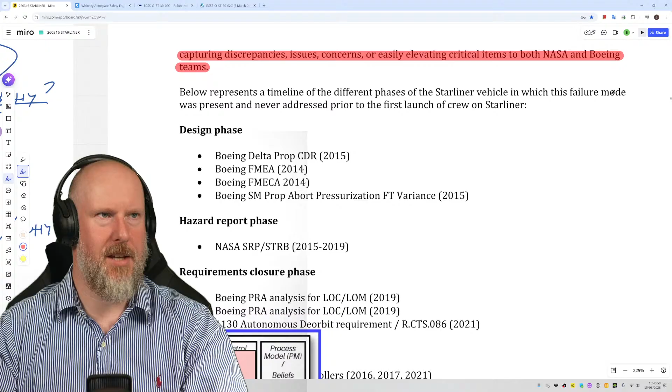Finally, this represents a failure in the operations phase with the lack of processes for capturing discrepancies, issues, concerns, or easily elevating critical items to both NASA and Boeing teams. Below represents a timeline of the different phases of the Starliner vehicle in which this failure mode was present and never addressed prior to the first launch of crew on Starliner.

Okay, so the first thing I'm going to say about that is I'm not surprised at all. And that's not a criticism of them or the organisation or anything like that. It's just that this kind of nonsense happens in a lot of organisations. It is organisational dysfunction in combination with people trying to do the right thing, but then been overruled, and other people making decisions and calling priorities that maybe shouldn't be involved in making these kind of priority calls. Or if they are, they need to document why they've made those decisions, but not lose these actions off the side of the list.

These are things that must always stay on the work list, on the assumptions list. But this is a challenge with any complex system organization. This is not— systems engineering is hard, and you have to be disciplined. And if you don't have processes that are working for you, or people that are either not disciplined or not prioritized in the right way or given the support that they need, then we shouldn't be surprised this kind of nonsense happens. So obviously I'm very sorry this has happened, but I'm not surprised. I've seen this type of thing more often than not, I would say, but that's because engineering is hard.

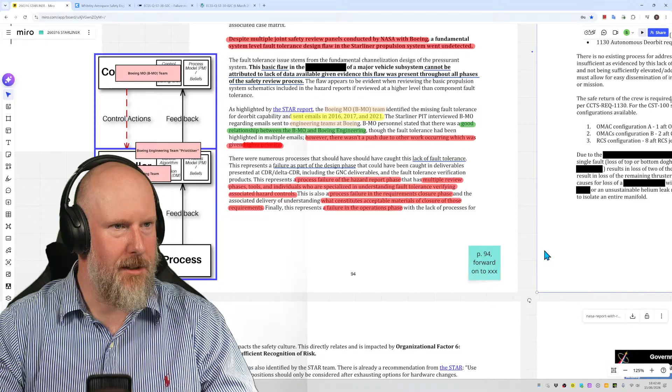Anyway, right, here we go. Design phase. So during the design phase, this was 2014, 2015. Service module, propulsion abort, pressurization, FT variance. Is that fault tolerance variance?

So this is 2015, hazard report phase. So the NASA SRP - is that safety review panel maybe? I don't know. 2015, 2019.

Requirements closure phase. So this is the probabilistic risk analysis for loss of control, loss of maneuvering probably, I'm guessing. 2019. So that analysis is the analysis I would suggest should have captured, identified this, and nailed this down and escalated it. So why didn't it?

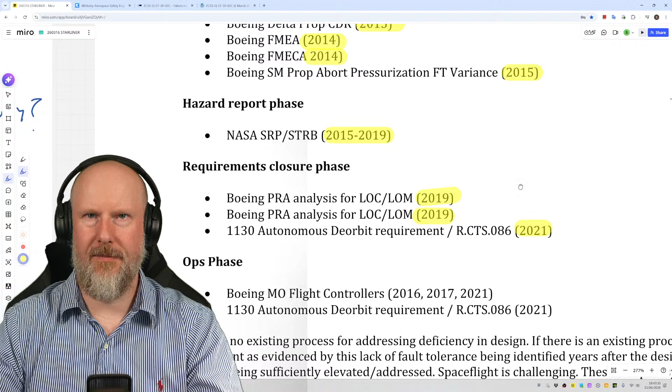Autonomous deorbit requirement - so that came later. It may be that it was okay back here, and then this new requirement came along and said we need an autonomous deorbit capability, which has certain fault tolerance requirements. And then that may not have been fed back into all these documents and updated and flowed through the process. I'm guessing, I don't know, but I imagine that's generally how you'd do these kind of things.

There we go. Right, operations phase. So Boeing MO, whatever that is, I can't remember, flight controllers. So Boeing MO flight controllers. Let's just get this, put it over there. So Boeing MO flight controllers. Okay.

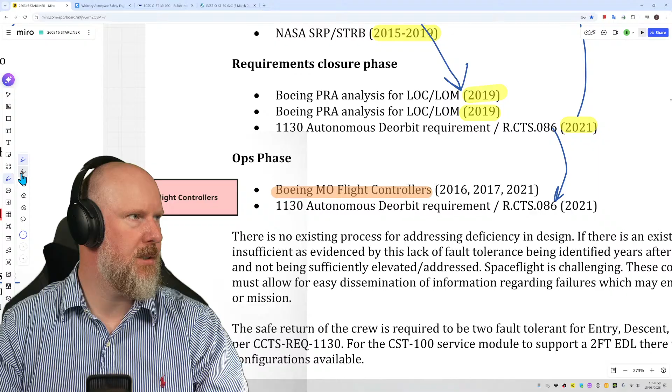Autonomous deorbit requirement - yes, that's the same one, 2021. P. No, P for pen. So that is that one there. Boeing flight controllers - is that review, I think, during 2016, 2017, 2021? There is no existing process for addressing...

There's no existing process for addressing deficiency in design. What? Why? Why is there not? Why? I mean, that's... Why? That's pretty basic stuff. Why would it make sense not to have an existing process for addressing deficiency in design? Is it because it's too complicated to use, the system they've got, so it's been ignored or left off?

If there is an existing process, it is insufficient, as evidenced by this lack of fault tolerance being identified for years after the design phase and not been sufficiently elevated, addressed. Spaceflight is challenging - yes, I absolutely agree with that. Yeah, it is. But any kind of complex system engineering is challenging. So it's not just that this application is difficult, the whole thing is difficult.

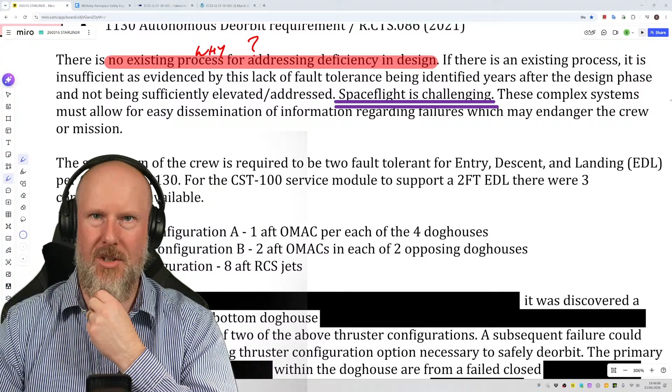These complex systems must allow for easy dissemination of information regarding failures which may endanger the crew or mission. The safe return of the crew is required to be two-fault tolerant for entry, descent, and landing per CCTS requirement 1130. For the CST-100 service module to support two-fault tolerance, there were three configurations available.

OMAC configuration A: one aft OMAC per each of the four doghouses. OMAC configuration B: two aft OMACs in each of the two opposing doghouses. RCS configuration: eight aft RCS jets. Due to blankety blank, it was discovered a single fault - loss of top or bottom doghouse blankety blank results in loss of two of the above thruster configurations. A subsequent failure could result in loss of the remaining thruster configuration option necessary to safely deorbit.

The primary cause for loss of a blankety blank within the doghouse are from a failed closed blankety blank - could be failed closed, could be controlled closed, thinking about dangerous successors again - or an unstable helium leak rate downstream of the blankety blank, resulting in the need to isolate an entire manifold.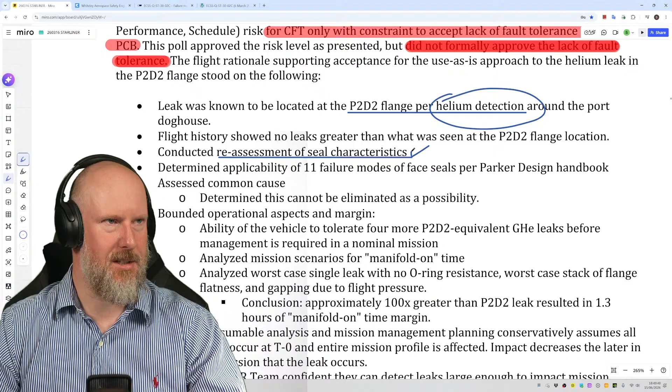That's the sensory feedback we don't know any details about, around the port doghouse. Flight history showed no leaks greater than what was seen at the P2D2 flange location. They conducted a reassessment of seal characteristics, which we talked about the other day, and determined the applicability of 11 failure modes of face seals per the Parker Design Handbook.

They assessed common cause and determined this cannot be eliminated. They bounded operational aspects and margin, the ability of the vehicle to tolerate 4 more P2D2-equivalent GHE leaks before management is required in a nominal mission. They analyzed mission scenarios for manifold-on time, analyzed worst case single leak with no O-ring resistance, and worst case stack of...

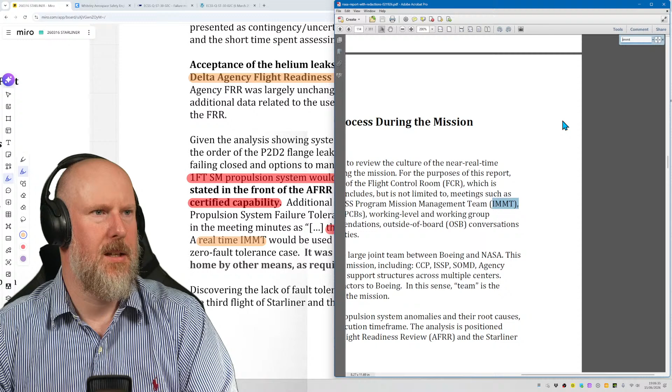A real-time IMMT, don't know what that is. Let's have a look. There's an SMMT there, look, Starliner Mission Management Team. IMMT is not in there, so let's search IMMT. Oh, there it is, look, ISS Program Mission Management Team. There we go, stick that in there.

ISS Management Team would be used to determine the best course of action if failures put the vehicle into a zero-fault-tolerant case. It was confirmed that the crew could also be left on the station and returned home by other means as required.

Unless, of course, the issues lead to the inability to dock with the space station, or being able to transfer from the Starliner to the space station. I don't know if they can do in-flight untethered transfer, I don't know.

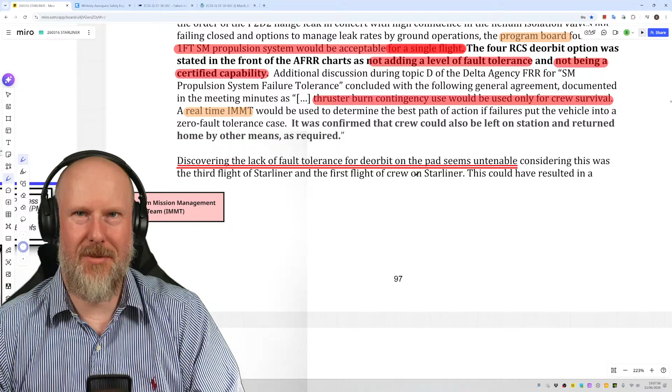Discovering the lack of fault tolerance for deorbit on the pad seems untenable. It doesn't seem untenable, it is, I mean it's ridiculous. Considering this was the third flight of Starliner and the first flight of crew on the Starliner, this could have resulted in a stand down.

To verifying the associated case matrices and similar analyses were valid. As detailed above, there were many areas in which this could have or should have been caught. However, the availability of operational controls to manage the helium system and the amount of commodity available on the vehicle created acceptable flight rationale to be considered.

Utilizing ISS as a safe haven and the possibility of the 4 RCS deorbit burn as a last-ditch capability helped solidify that the risk was acceptable to proceed to launch. I mean, yeah, that's quite a brave thing to do, I think.